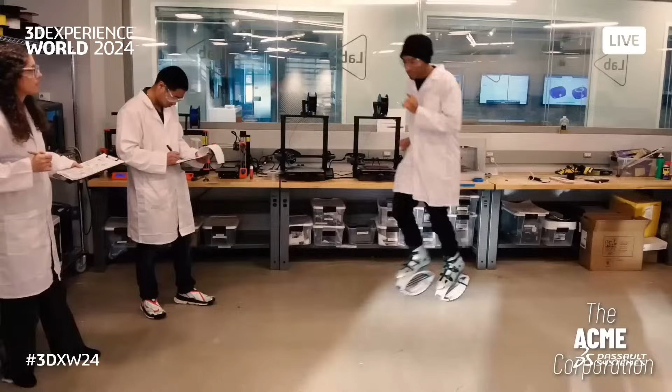My grandfather always used to say, our job is simple, to give the customers what they want, no matter what it is. And that really defines us today. Other companies might produce a product here and there, but at Acme, we make everything, literally. As you can imagine, our product portfolio is extremely robust. And of course, this can present significant engineering challenges. But whether we're looking to fix a minor design flaw or shatter the laws of nature and physics, we will never tell a customer no, even if maybe we should. It doesn't matter if you're a Fortune 500 executive, a startup entrepreneur, or an anthropomorphic wolf-like creature looking to catch and eat a flightless bird. If you can dream it up, we will deliver something.

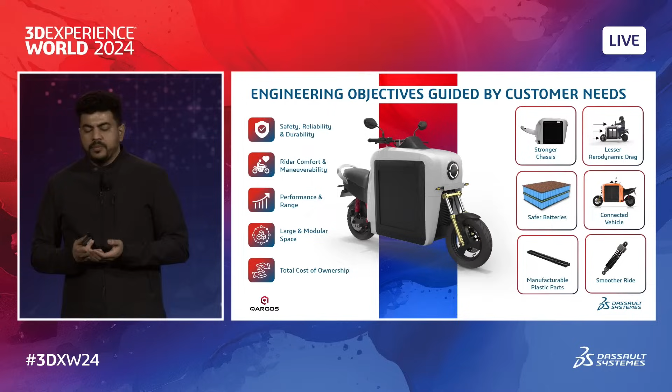And on the right side, you can see the translation of the customer wants and needs into engineering requirements, which talks about the stronger chassis, lesser aerodynamic drag for the fatigue, safer batteries so that they don't catch fire, connected vehicle platform, because we are talking about tech, the traceability, tractability, the design for manufacturing, and at the same time, smoother ride.

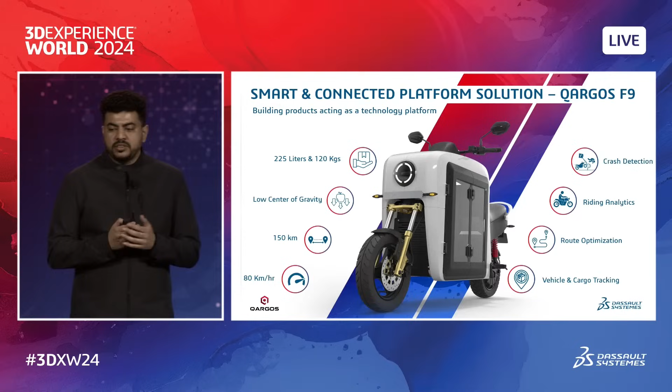So today we are introducing the world's first cargo scooter platform, which has got 225 liters of space, 120 kgs, lower center of gravity, 150 kilometers of range, about 100 miles, 80 kilometers per hour top speed. Now, the architecture is potentially much more potent for higher speeds, and it has been designed like that. At the same time, we have built it as a technology platform, which helps improve efficiency by integrating a lot of new sensors. Maybe you can talk about crash detection, riding analytics, route optimization, vehicle cargo, and tracking. So we have built it as a deep tech platform.

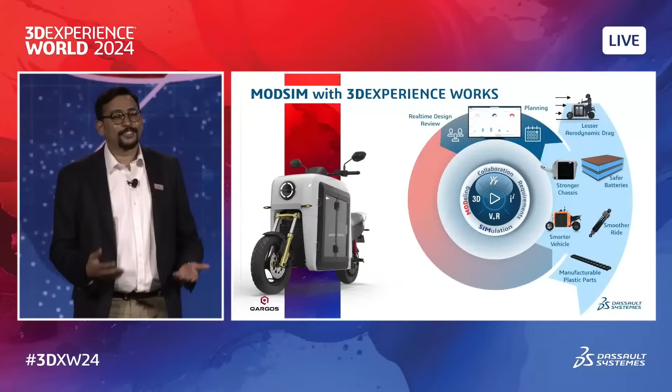Just an idea. Yes, absolutely. We will definitely find a lot of applications for it, and that's a nice idea. We can definitely create some safe space inside it as well.

So during this particular journey of product development, a lot of companies get into the vicious cycle of build, test, break of prototypes, and we didn't want to get into that trap. To avoid that, what we essentially did is leverage the ModSim approach, a unified modeling and simulation approach, which helped us reduce our overall product development cycle time far below what it typically takes to develop a product like this.

And because this does not have benchmarks, when you don't have benchmarks, each iteration that you do becomes a benchmark. So instead of real-world iterations, you are doing digital iterations which help you build, test, break digitally, not in the real world. It saves time, it saves cost, because at the end of the day, it's the computers which can run 24/7 and help you deliver on the results.

So to name a few, we'll be talking about them in detail. So we leveraged the 3DEXPERIENCE platform to its full potential to make the product much more robust, so that when it comes out in the market, it is in the media and in the news for the right reasons and not for the wrong reasons, right? We want everybody to be safe, and that's what we have essentially leveraged.

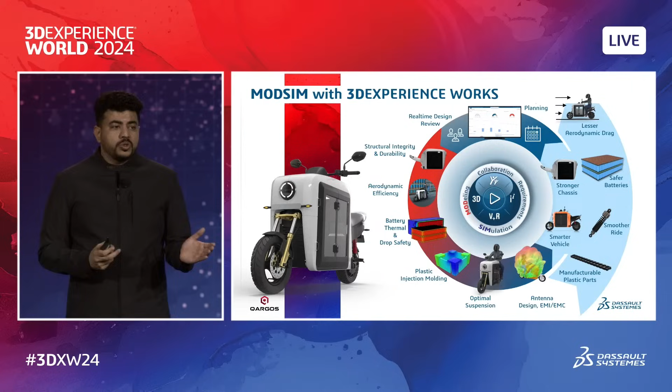I must also say that just like the way we are trying to simplify the lives of people or the logistics, in similar fashion, the ModSim approach has simplified the product development cycle. Can you share a couple of examples?

So let me invite my colleague, Pranav, who is going to talk us through the simulation journey that we have done. Right. Thank you. So we saw how the rocket-powered vehicle crashed. It's mostly because the aerodynamics is not right, I believe. But we did the simulations on our vehicle. The drag simulations gave us a good ride and handling phenomenon on the vehicle.

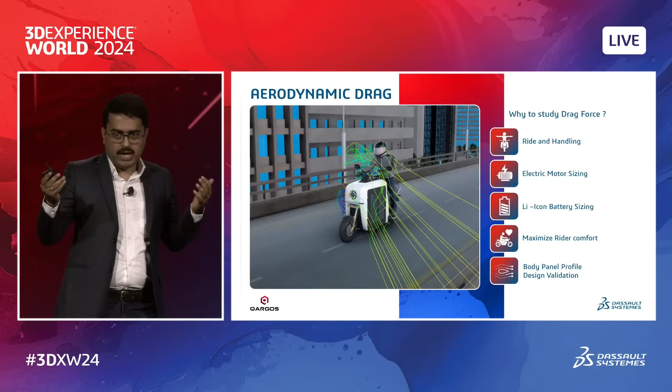We did the simulations and understood the forces acting on the vehicle from the front, the left side, and even the crosswinds. The drag is also important to understand the vehicle motor sizing, right? If there is a higher drag, we need higher power to push the vehicle. It means we need to put a bigger motor and a bigger battery pack, which is going to increase the cost of the vehicle.

Then we also tried to understand the rider comfort. Imagine there is a lot of turbulence coming onto the rider's face; it is going to make him fatigued very early, making the ride not very comfortable. We want him to enjoy the ride as much as possible.

Then the very important reason why we did the simulations is to understand the streamline flow across the vehicle panels. How it helps us is we get the first instinct on how the body panels need to be designed. So what you see here, the body panels have been designed with respect to their aerodynamic drag calculations and the streamline flow. Let's look at how we did it.

So we did the simulations with both the front wind and the crosswinds onto the vehicle, right? Crosswinds can happen for multiple reasons. It could be in windy areas, or maybe a heavy truck passing through, and thus we identified the pressure zones acting on the vehicle.

You can see in the first case, in the front wind, there are a lot of pressure zones created on the vehicle, basically on the console panel and the front side. When it comes to crosswinds, we see a lot of red areas on the side panel of the vehicle. The 15-degree angle crosswind, 30-degree angle crosswind, and so on.

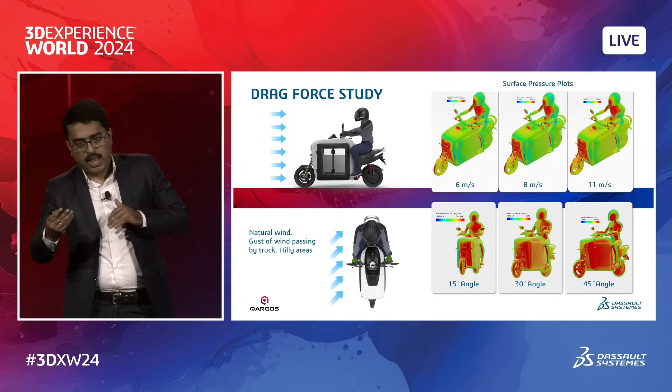So Pranav, you ran these simulations on the 3DEXPERIENCE platform? Sure. With the fluid dynamics engineer role, all on cloud. You got the results and identified some of the hot spots, high stagnation areas on the vehicle. Yes. What kind of design changes did you make going back to SOLIDWORKS? Well, yes, we can show you that.

So this is one particular high pressure area acting on the front side, right? You can see initially the design was kind of a shark fin type. This was modified to a much curvier shape. So you can see the existing vehicle with the modified design. This has helped us reduce the drag to a large extent. And that's what we're seeing right here.

Yes, that's the one here. So maybe for the rocket-powered vehicle we need to do something like this.

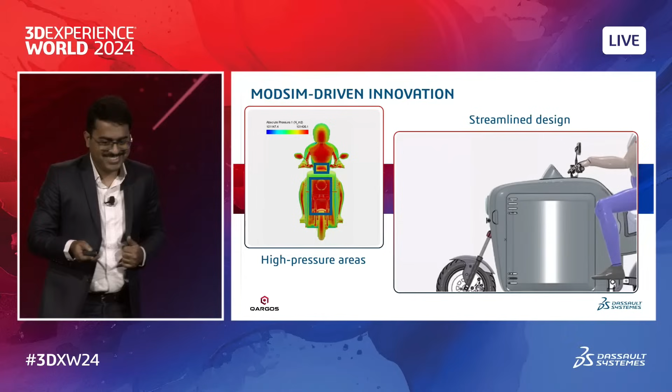All right. Yep. So this is one of the challenges that we faced. Let's talk about the battery also.

So this is one particular challenge we face a lot in electric vehicles nowadays. This is the exploded view of the battery pack, which showcases multiple materials and different components involved. As you see, there are quite a number of materials used, and different types of materials. For example, shock absorbing foam, aluminum material, injection plastic cell holders, and these all contribute differently to the thermals of the battery pack. Let's look how.

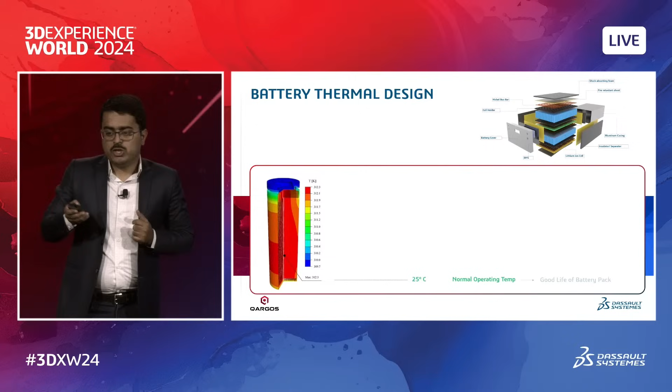So a battery pack consists of a number of cells, right? These are lithium ion cells. Now lithium ion cells are essentially electrochemical in nature, and since they are electrochemical, they are sensitive to temperatures around them. So if you push the battery pack to higher temperatures, there is a chance of it getting damaged. If you push it further, there is a chance of having a thermal runaway.

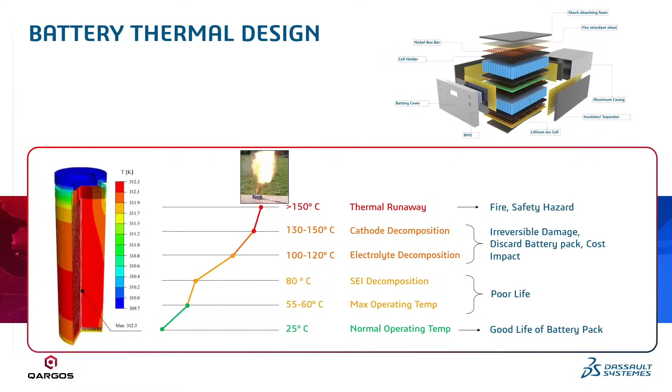What it means is one of the cells will catch fire and it will transfer the heat to its adjacent cells, and so on. A chain reaction starts, leading to the entire battery pack catching fire and exploding. This is a safety hazard, right? So how did we solve this issue?

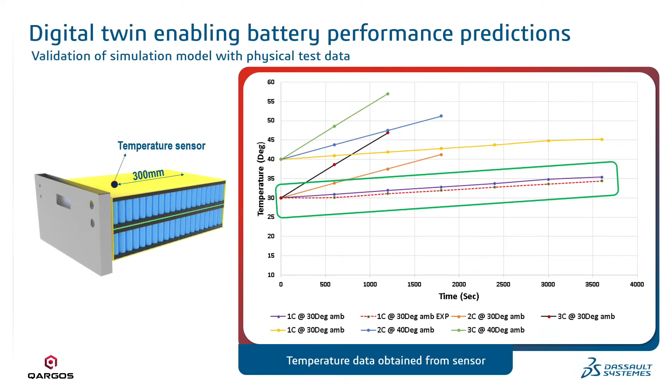Let's understand. We conducted simulations on this, and we understood the temperature rise of the battery pack at various different points, and we also did the physical tests, and then we matched both the curves. So here you see both the simulation and the experimental results match with a strong correlation. This is extremely important. This is for the worst case scenario on a hot sunny day.

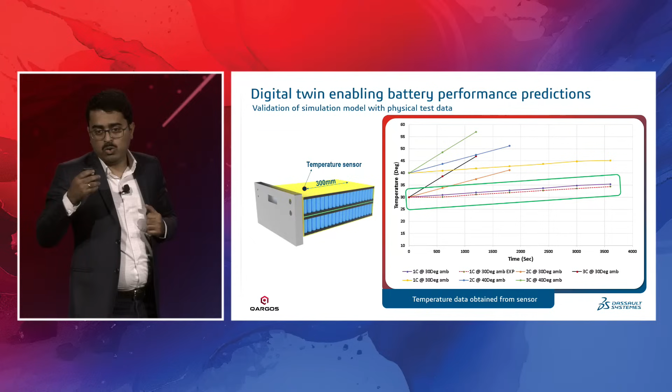So you see 6 cases over here. The bottom case is the worst case scenario, and we did try to achieve a good amount of correlation in this particular phase. Let's look at the graphs. This particular image explains how the thermal runaway happens. If one cell is heating, it passes the heat to its adjacent cells, and so on, a reaction will happen, causing the battery pack to explode and catch fire.

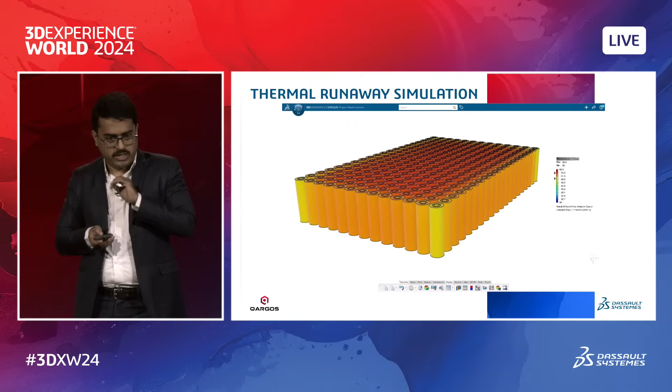Anyways, we are going to see a lot about these two challenges in depth in our user sessions. We have seen today the battery, and tomorrow we are going to talk about the aerodynamics. For now, let me call on Alok to discuss the MODSIM benefits. Thank you, Pranav.

Thank you, Pranav. He reminded me of the whole journey we have gone through with so many simulations that we have carried out in building this vehicle. When we look at the MODSIM benefits, there are plenty of them. We can go on talking about it, but one of the key things which I personally like is the cloud computing. Being a startup, you always have limited resources.

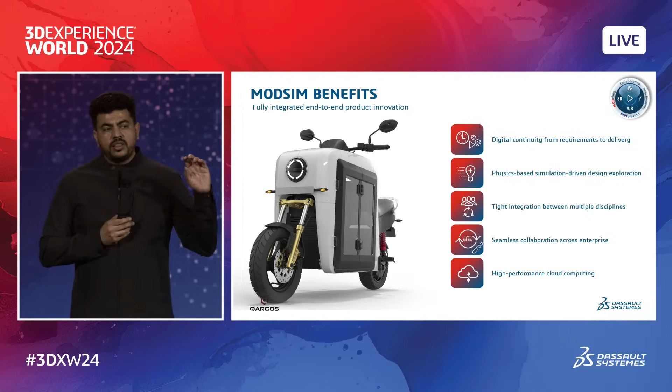So being able to do simulation remotely without having your own infrastructure was one of the most important elements allowing us to do complex simulation much faster. If we had done that on our machines, it would have performed, definitely. But with cloud computing, your resources are basically free to do whatever you want while the simulation is being carried out. At the same time, there's the collaboration, and you can monitor and look at the simulations remotely as well.

So let's talk about the benefits you have realized because of the MODSIM approach on the overall vehicle design. Definitely, Shri Krishna. We cut down the weight by 30%. We made the vehicle far more aerodynamic than it was previously. At the same time, we maximized the cargo compartment. When we started, the cargo compartment was about 175 liters. By virtue of having a compact battery pack that we are currently in the process of getting done, we have maximized the cargo space from 175 all the way to 225. That's a massive increase.

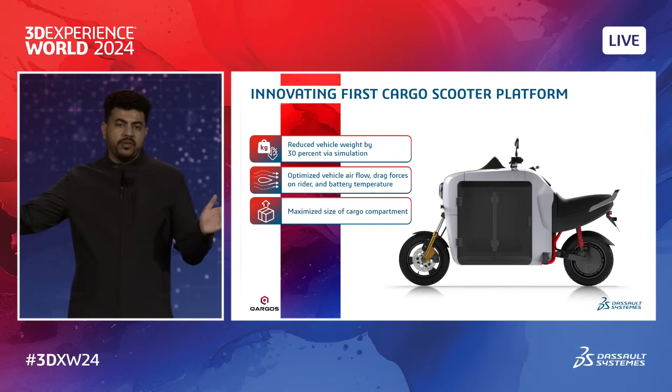That's big. And tell us a little bit about the projects that are lined up this year. There are plenty of them. We are all excited about it. Internal testing, the battery drop test, the new battery that we are designing right now. We are working on this right now. We are very, very excited, and we are happy to share our journey.

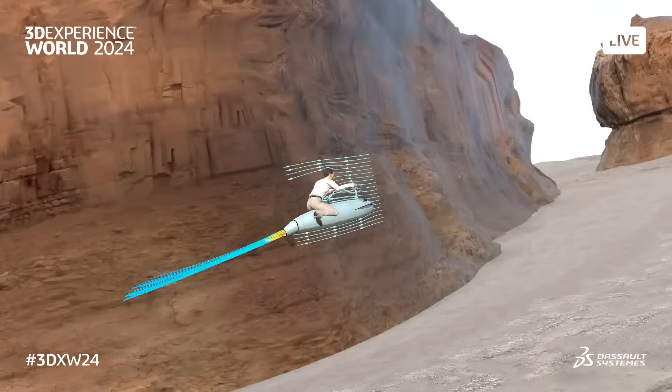And can you guess what was the big design change we made? Well, I noticed that it's more blue than mine. Yeah, that is a color very attractive to kids these days, but it's the wings that were missing in the front. Oh, yep. Fantastic. That's great. You guys are awesome. Oh, trust me, we know.

Now, tell me if you have some other product challenges that you're running into. Okay, gladly. Well, you might not figure this, but our best-selling product that Acme makes is an anvil. We sell tons of anvils, no pun intended. Wow. Sure. But what we find is that our customers really love to just drop them on the heads of their enemies, fair enough. But the problem is anvils are very heavy. Yep. So if you're going to drag it to the top of a mountain cliff or something, by the time you get there, your prey is long gone.

Okay. It's a problem. So we've been trying to experiment with lighter material to make the anvils so that it's light enough to carry, but still heavy enough to create that great big welt that forms on the top of a head, you know what I mean? Oh, I remember that from good old days. Yeah, but there have been some challenges there too. I think I have a drop test here I can show you. All right, let's take a look.

This is a drop test, one of our lighter anvils. And as you see, it was way too light. So that's not going to work at all, obviously. So our next step is we went back to the heavier anvil, and then we bundled it with an old-timey street sweeper, a table fan, and a weather balloon. Obviously, yeah. You can understand the idea that you could just sort of hover it out to the exact spot you want.

But I'm sure you can guess what happened next. We would drop the anvil, and then the whole thing would shoot up into the air. The weather balloon comes untied, then becomes this whole big thing until it smashes into the ground. Wow. It is not great for repeat business. Yeah. So has that damaged your business at all? It's been a real loss leader for the past 200 quarters or so. 200 quarters? Yeah. Wow. Yeah, that's not a long time at all.

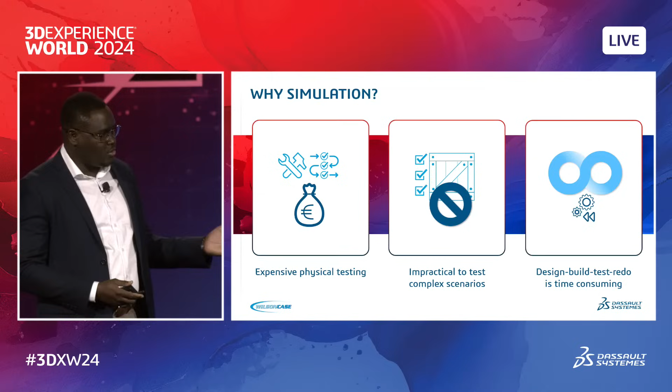So David, what were the primary reasons for really embracing simulation? I mean, you kind of explained that. Yes, absolutely. So we explored various alternatives before settling on simulations. And as you know, you can delve into testing machines to ensure that you can successfully validate your shipping cases. But we decided to opt for a ModSim approach because it is essentially easier to simulate complex scenarios. So after the assessment of our needs and in our quest to address the identified challenges, we explored various alternatives before settling on simulation as the preferred solution. We did some shopping around and finally went with the 3DEXPERIENCE SIMULIA platform.

Now, why simulation? Well, for example, physical testing can be very expensive and can only indicate whether failure occurred, but it cannot determine the degree of failure, nor show you how stresses evolve throughout the body. Whereas with virtual impact simulation, you can simulate and understand how your product would crack under various levels of force, hence making it easy to find failure points early in the product development process. Or sometimes you can be faced with impractical-to-test scenarios. Or let's say you've designed, you've built, and after testing, you realize that there are some weak areas. So you have to go back through the same cycle again, design, build, and test. And this is time consuming. Sounds like that's what you're doing. In a big way, yeah.

Yep. So at this pivotal moment, simulation, with its ability to model complex scenarios, emerged as a proactive response to address the intricacies and limitations we've encountered, since physical lab testing can be significantly costly and limited in certain contexts. Now that we've covered the depth of why simulation, let's move on to our objectives. Our objectives are pretty much straightforward. We want to prevent equipment damage, enhance the structural integrity, and then finally optimize the packaging design for cost effectiveness.

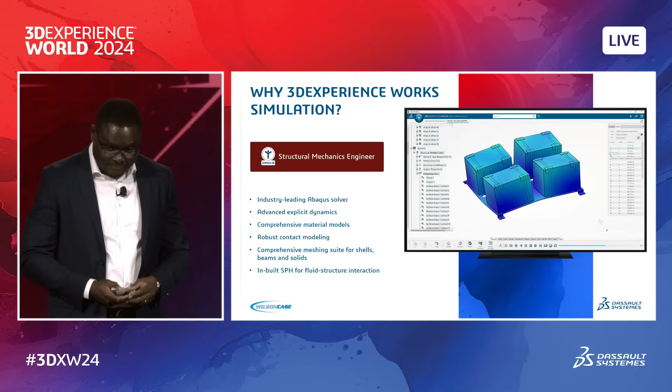Now, why 3DEXPERIENCE Works simulation? I've kind of touched a little bit on this, but again, we explored various alternatives before settling on simulation. One aspect we really love about the Structural Mechanics Engineer role is that it enables you to perform complex structural simulations covering linear and nonlinear statics and dynamics, both implicit and explicit, all taking advantage of the industry-leading Abaqus solver technology. Absolutely. All right.

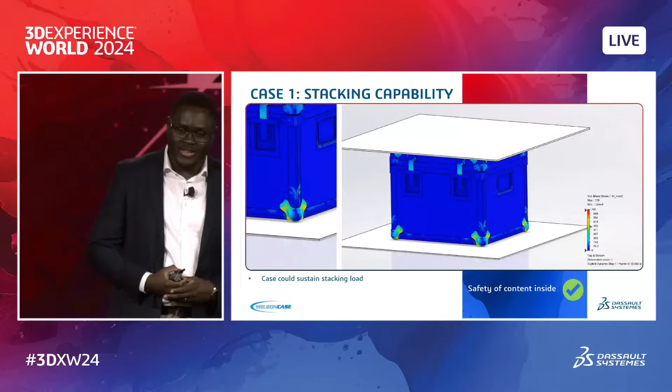Now let's proceed with some case studies. This compression simulation enabled us to ensure that the case can successfully protect the enclosed product from compressive forces that may occur during transportation and handling. This simulation enabled us to ensure the quality and reliability of our shipping case. And as you can see, Mr. Warner, the case is doing a great job in protecting the content. I see that.

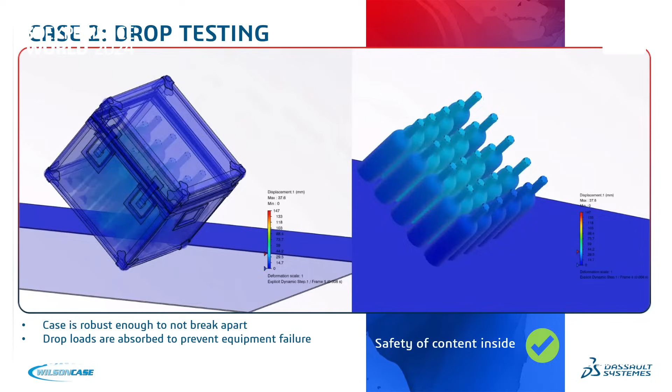This drop test simulation enabled us to ensure that the case is robust enough not to break apart and that the drop loads are absorbed in order to prevent equipment failure. And the case is performing really well in protecting the content. So David, if I may ask, while it's a beautiful looking simulation, it's also a very complex and compute-intensive simulation. Can you elaborate, how have you been dealing with those massive computational requirements? Yes, absolutely. And that's the beauty of simulating these complex structures on the platform. Whenever you invoke design changes, these changes will be automatically reflected on the platform. So at that point, all you have to do is update the model and rerun your simulations. And pretty much all on cloud. Exactly, all on cloud. All right.

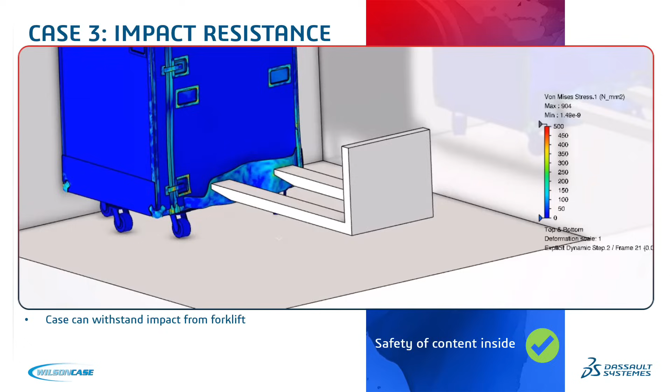This forklift impact simulation enabled us to understand how our case would respond to this kind of impact. It enabled us to assess the structural response of our case. And after running the analysis, we realized that the case is robust enough to protect the content from potential damage.

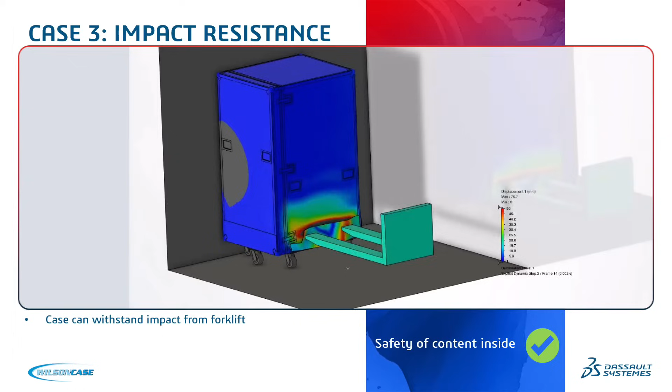These are some really cool structural simulations because as engineers, we like to see things break, poke, and fall. Exactly, Sri Krishna.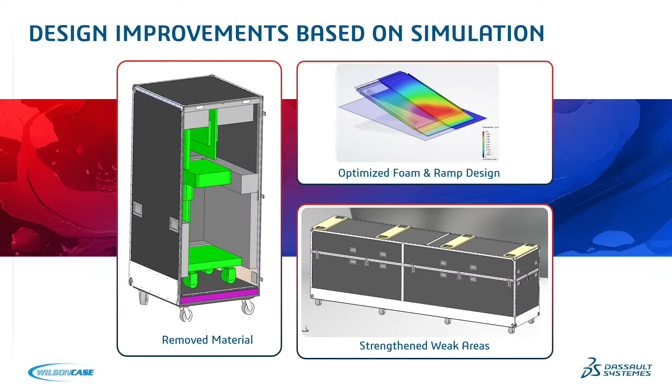In the bottom picture here, after a rigorous examination through simulations, we also noticed that the top panel needed to be strengthened in order to sustain the load-bearing capacity of another case being stacked on top of it. And that's why we've added these rectangular panels in order to give that rigidity to the case. All right, and you're making all these designs in SolidWorks, updating on the platform seamlessly.

Exactly. That's great. Tell us some of the values or the benefits that you've realized because of these design changes, because of these improvements as an overall organization. So with 3DEXPERIENCE Works, we are able to give our customers a value-driven product by reducing prototyping and warranty cost. We can also decrease material cost, enhance quality and customer satisfaction. And finally, the ModSim approach has facilitated entry into new markets, driving business growth for us.

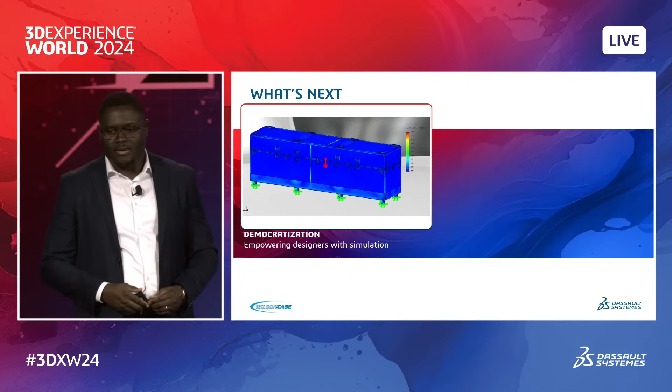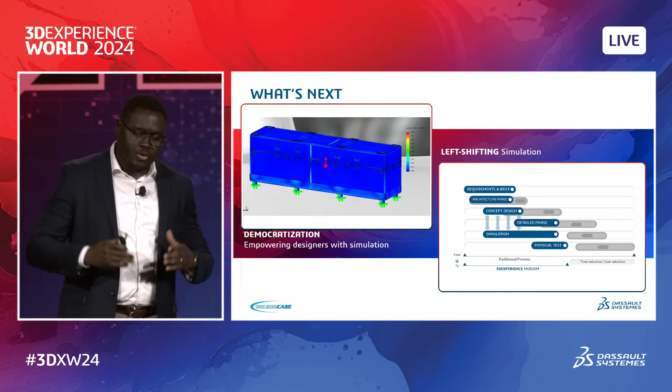Before we conclude, let's set the stage for innovation by exploring our roadmap for future work. We're working on the democratization process by empowering designers with simulation. And also, we want to left shift our innovation processes. As we move forward, let's embrace the power of ModSim to revolutionize the way we approach reusable shipping case designs. Thank you for your attention.

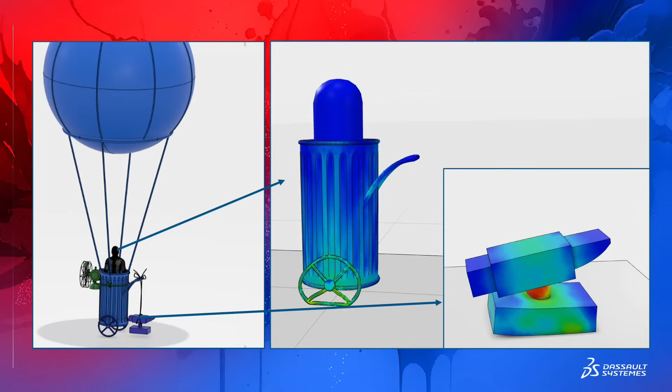You know what? I explained your use case to our product engineers and designers. They didn't really get it, but nonetheless, they created an impact simulation and optimized the design of your very interesting vehicle. Let's see what we got. So on the right hand side are the impact tests, and on the left hand side is your breakthrough revolutionary design. And what we found out from the simulations of the optimized product is that the anvil is now able to go down without breaking, and so is the impressive vehicle that you guys have designed. This is great. If we adopt this, I'm going to be rich. Richer, of course.

Listen, can I ask you about one other problem we're having? Sure. Because I want to talk about modernization. Our company has always been very analog. We make mechanical projects. Of course, sometimes there's radio-controlled things here and there, but those never worked, and no one ever really expected them to. But today, all customers want everything to be smart and connected, and that's causing a real headache for Acme. Here's an example. We tried to make a drone recently, and it did not go well. Do we have a clip of this?

Sure. So whenever we make the drone, at first it works well, but inevitably after a couple seconds, it starts attacking the engineer, see? Yeah, he got banged up a lot with that one. And the problem is we did our market research, and it turns out customers almost never want a drone that tries to kill them. Well, it looks like you need help with improving the communication between the controllers and their devices like the drone, probably some improvement in the antenna design. So we have somebody here who has a ton of experience dealing with a somewhat similar issue, not killer drones, but antennas. Let's meet him.

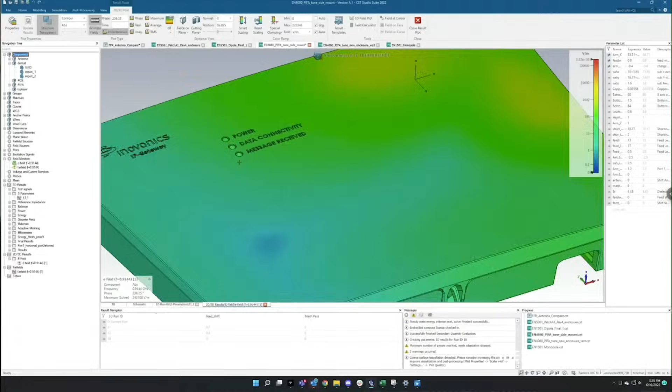Inovonics is an industry lead in wireless technologies. I think it's a very creative process when it comes to designing antenna. Anything can be an antenna. Sometimes some things are antennas when you don't want it to be. I've built some pretty unconventional antennas in the past year and a half that I don't think would have been possible to make without 3D simulation. You can really break the boundaries of creativity with how you can fit something in a place maybe it shouldn't have fit in before.

Ladies and gentlemen, please welcome Mark Zackham from Inovonics. Welcome, Mark. Good to see you. Thank you, thank you. Nice to meet you.

Nice to meet you. So, Mark, my friend Corey here is dealing with some killer drones which are having wireless communication issues. Tell us how you develop antennas and make them safe and efficient without chasing people around. Yeah, hopefully I can help you with that, Mr. Warner. I'm Mark Zackham. I'm a hardware design engineer at Inovonics. And today I'm going to go through a bit of our design process and what it takes to make an antenna for modern devices. Go for it.

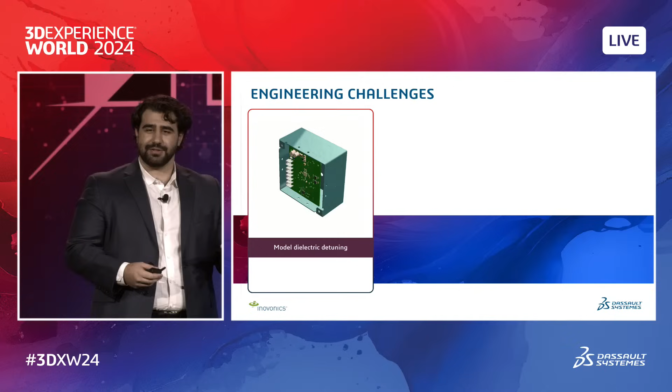All right, Inovonics. Inovonics is a leader in wireless technology. We make custom hardware and software solutions for various markets. Some of these markets are senior living and commercial security. When it comes to designing an antenna, we're going to have a plethora of engineering challenges to overcome. I've kind of summarized these into 3 different challenges to go through the whole process. This way we can understand what it takes to make something as complex as an antenna.

The first one is modeling dielectric detuning. Now, what do I mean when I say dielectric? In simple terms, dielectric is just a way of describing a material in the way it interacts with an electrostatic field. The more different the dielectric constant is, which is just a number we put to that value, the more it will affect the antenna.

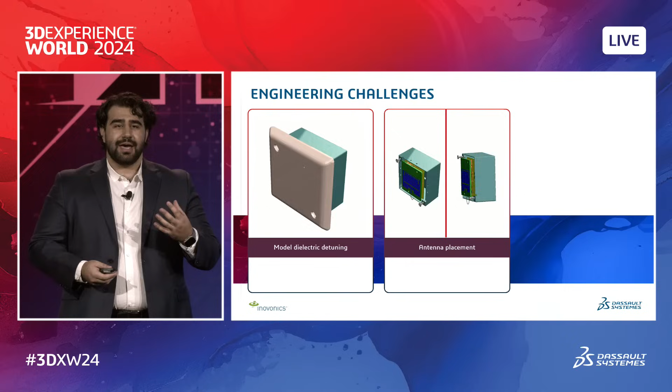Our next challenge is antenna placement. This is for inside an enclosure and also within the environment that it needs to be placed in. When it's inside the enclosure, where the antenna is placed is extremely important. We want to make sure that it can radiate the way we want it to and that nothing is interfering with it, when it comes to if someone is holding the device, if something gets in front of it. We would need to account for all those situations when it comes to designing an antenna.

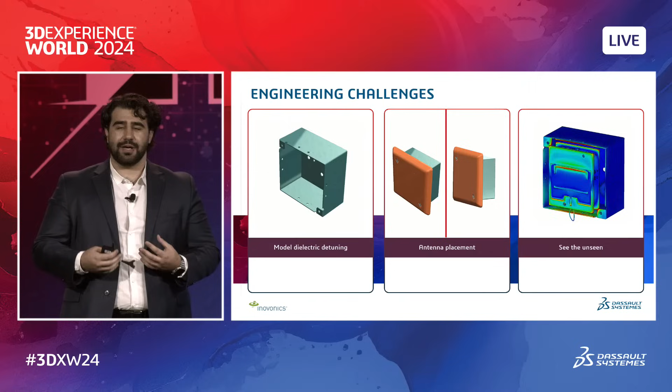And last but not least, see the unseen. Now, before simulation softwares, we really couldn't see how antennas radiate. It's just not something that we can do. But with simulation softwares, we are able to understand the way our antenna is performing and the way our antenna is interacting with the environment around it. And it's also really nice eye candy to look at when you're watching these simulations.

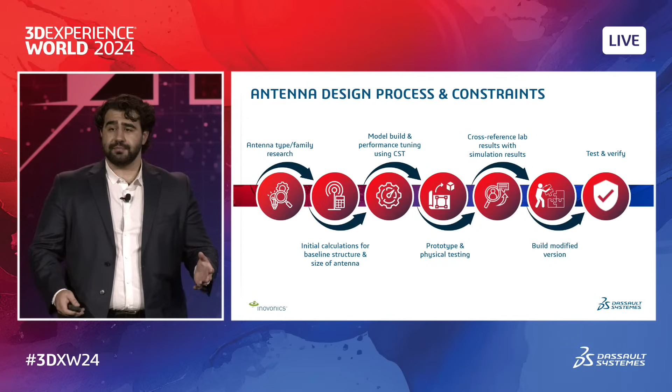So, Mark, some of us don't come from the electromagnetic background. So tell us, what is the typical process of an antenna design in very simple terms? Yes, of course. So, as most design processes go, it all starts on a tissue paper. What do you want to make this for? Where is this antenna going to be placed, and what does it need to do? From there, you'll get a rough idea of the type of antenna you want, and you'll do basic initial calculations.

Those calculations can build you a rough model in simulation, and then from there, you can go and make a prototype. These prototypes are tested in labs, and we try to get the same results we've been seeing on the simulation platform. We overlay the lab results and our simulation results together to try to build a more accurate simulated model, so in the next revisions, we know that it will show what we're seeing in real life. And then we keep this process going until we have a design that we like for production.

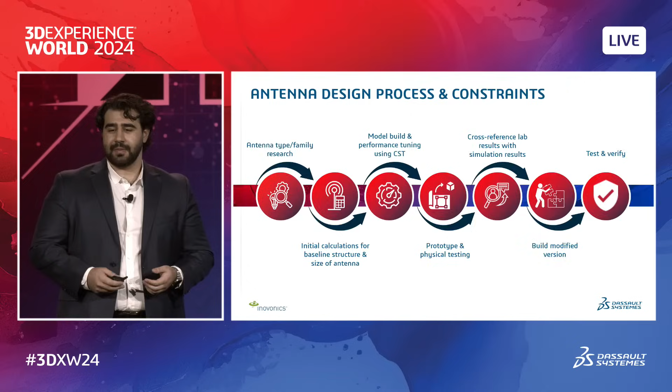So why 3DEXPERIENCE works. One, this platform is extremely powerful. The ease of use of building a model and getting it to prototype is quicker than other solutions that I've seen, specifically within CST Studio, which is the electromagnetic solver that we use to perform all our work. With this, we can simulate rooms, model scattering, see placement of our antennas, understand different environments and different scenarios to do my job right and make sure that the customer gets something that works every time.

So Mark, you perform electromagnetic simulations in the electromagnetics engineer role on the platform, and then your designers make the design changes recommended by you in SOLIDWORKS, and you're able to collaborate back and forth seamlessly.

Yes, it's pretty incredible. Working with our mechanical engineers, we usually need custom enclosures for every design that we make. All our hardware is custom, so we need to make sure that everything interacts appropriately. Doing the collaboration with our SolidWorks team means that not only do I know that the antenna is in its optimal location, the mechanical engineers understand everything that the hardware engineers need to do to get the product right every time. That's great, thank you.

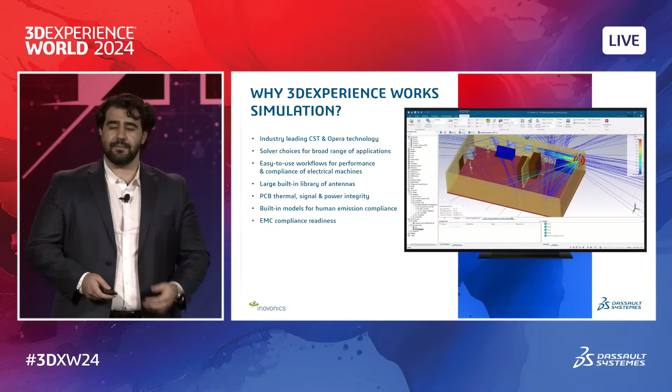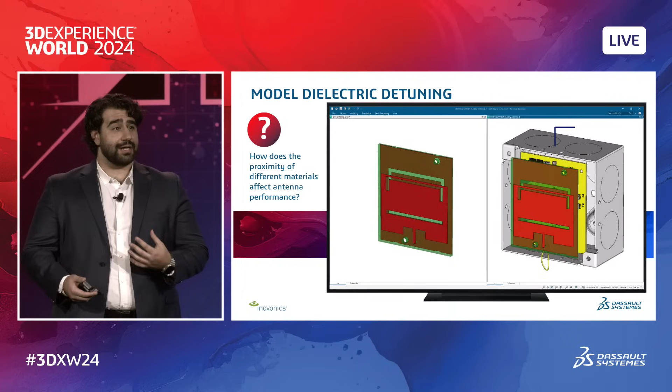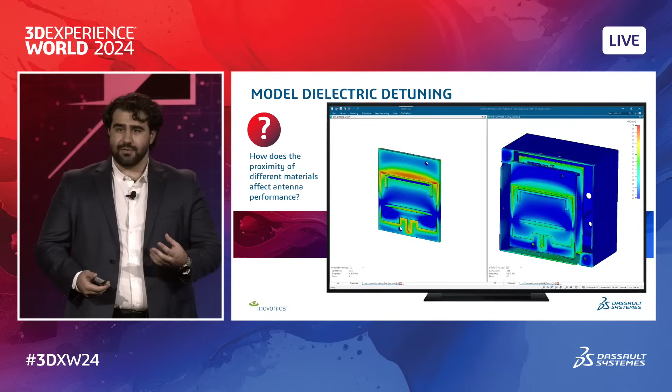So we're going to dive a little deeper into dielectric detuning. When I say detuning, I mean any material that gets within the range of the antenna is going to shift the frequency that the antenna is going to be performing at. And sometimes these shifts can be so great that your antenna becomes out of the bandwidth that it needs to perform in. In CST, we're able to take these materials and the entire enclosure, thankfully from our mechanical engineers, bring it in and understand the effect of these dielectrics on our model.

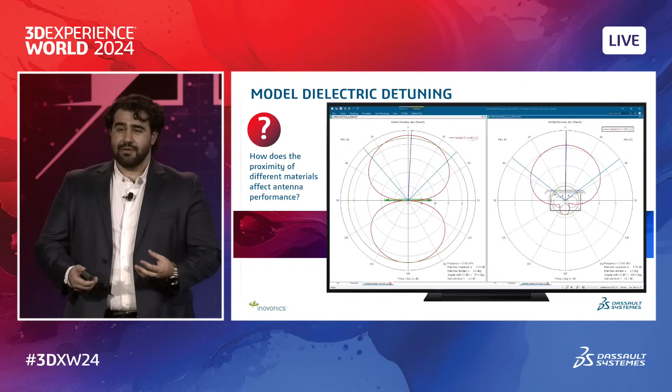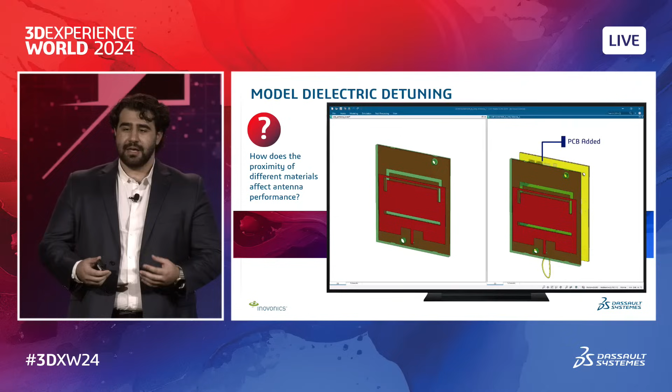From there, we can design the antenna around the detuning to make sure that when the antenna is in its final enclosure, it's actually tuned to the correct frequency. We build it for its design. The design doesn't change it.

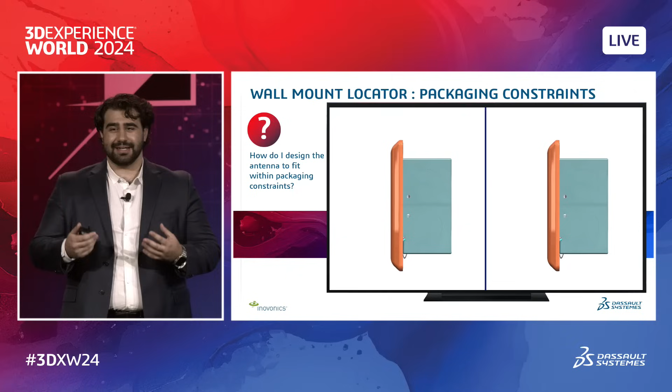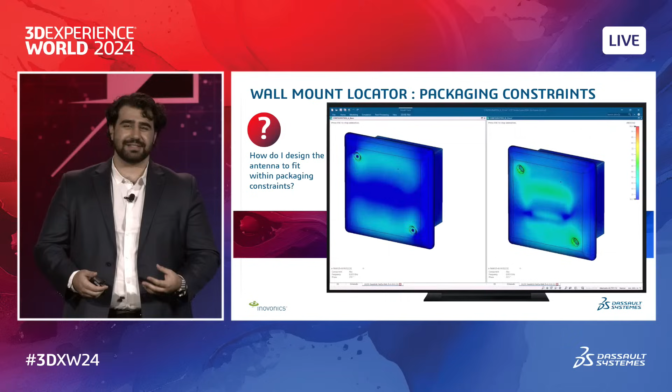And then this leads us into packaging constraints. When it comes to making an antenna, an important thing is understanding where it needs to be and the frequencies it needs to run at. Specifically, our product, the wall mount locator, needs to run at two different frequencies: a lower frequency in the band, sub-gigahertz, and 2.4, which is Bluetooth. To make a dual band patch antenna to work at both those frequencies in a metal box is pretty hard. If anyone knows, metal and antennas aren't great friends, and they tend not to make each other work out.

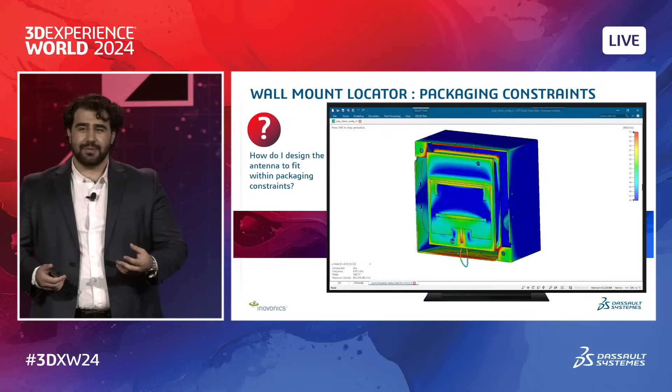So we designed around this. First, we kind of bent the physics of what it means to make a patch antenna fit within a standard 4x4 metal box. At the frequencies we wanted, a normal patch antenna would simply not fit. Through CST Studio, we're able to change things around, do some very clever physics and math to make sure that we design something that not only fit within our constraints, but actually performs phenomenally at both frequencies.

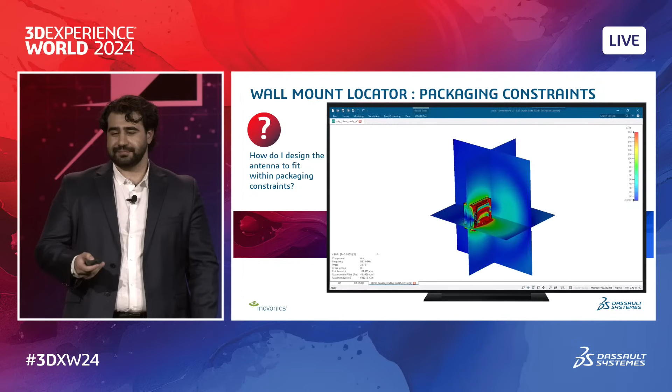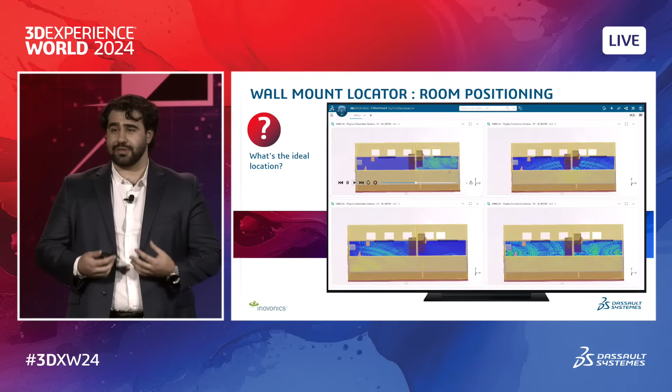And then now we talk about room positioning. Positioning is extremely important. This is a locator. It needs to communicate with our devices to make sure that everything performs optimally. And now we can account for that within software. We don't need to guess when we're on site where to put our locators and see if it works and do multiple runs and testing. We can account for most of what we're going to expect by taking floor plans, making a room model, and seeing how it's going to perform.

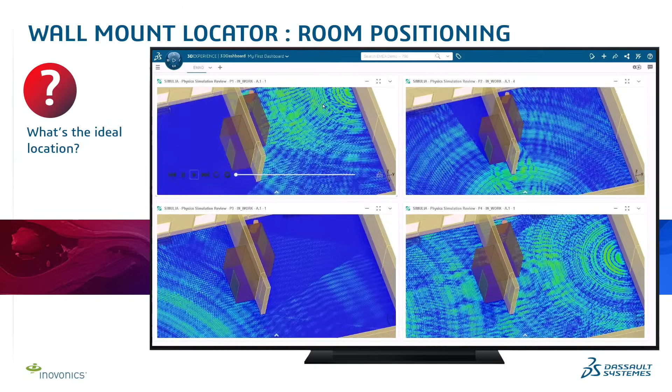We can throw it on the ceiling. We can do different heights on the wall. We can do corners. And we can understand where this needs to be for the best solution. This saves time for our technicians, for the people on site, and for us at Inovonics. So what are the key benefits you have realized because of this amazing work you've done?

There are many benefits that came out of this. One is the ability to work anywhere on any device. Having the online platform allows me to do my job on any device. I just need a browser and internet connection. I can run my simulations on online cores. I don't need powerful computers at all times. Therefore, I could be at a coffee shop with a tablet getting a simulation done, or I could be on site on a powerful computer getting it done.

The possibilities are endless. And collaboration with our mechanical team is also vastly improved, cutting down the work time, what it takes to send files, make sure that we have the newest ones, make sure we're all aligned. The online platform gets that covered for us.

What do you think? Well, I mean, that's all well and good, but you're really telling me that if I just place the antenna in a different spot, that will stop my drones from wanting to attack humanity? Let's find out. So, we took your drone, came up with a nicer antenna design, found the right location, did the dielectric detuning, and we were able to simulate in the electromagnetics engineer role that showed this red apple looking plot, which means that the communication is quite efficient in most of the directions. So this means you can now save a lot of human lives, Mr. Corey. You know what? I'm sold.

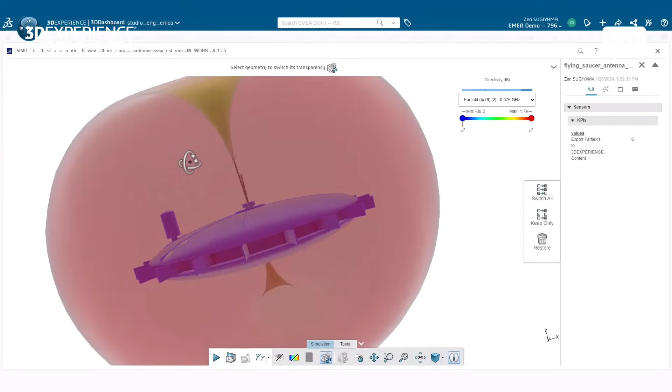This is fabulous. Tell you what, I'm just going to call up a live feed of my office right now. Oh, good. The meeting hasn't started yet. Listen, I have got a face-to-face in my office back in Arizona in about 10 minutes, and I'm going to tell them all about this. Thank you so much. Wait. Did you say Arizona and you're going to be there in 10 minutes? Yes, of course. How's that possible? I'm going to teleport. You're kidding me. Hey, not all of my products are defective, okay? See ya. What? I can't believe this guy. He said he's going to teleport? That's his office. How's he going to be there? Oh, he really made it. Ladies and gentlemen, give a big round of applause to Mr. Corey Warner.

Now that we all learned the values and benefits of unified modeling and simulation, it's time to learn about what more our customers can do with the new updates on the 3DEXPERIENCE Works simulation portfolio. I'm going to invite on stage Delphine and Steve, who lead the product management organizations from the Simulia and Solidworks brands of Dassault Systèmes. Please welcome them with a huge round of applause.

Hey, thank you, hi Steve. Good to see you. Thank you. All right. Thank you, Sri Krishna. What a show. Hey, Stephen, how are you doing? Great to see you on stage. Great to be here. It's good to be back. Yeah, indeed. What do you think of these amazing customer stories?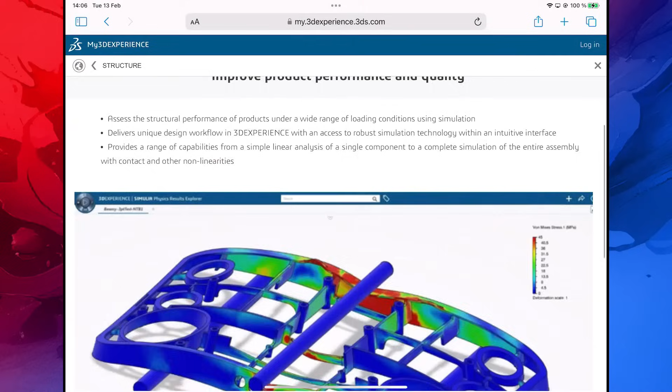And once you go to the simulation portfolio, you can do a deep dive into structural analysis, flow analysis, motion, electromagnetics, plastics, all you'll need to know to develop your products. Definitely, Stephen. So if you do not know yet the 3DEXPERIENCE Works portfolio, I invite you to visit our 3ds.com website and use the compass for your navigation. So let's go on to simulation and talk about structural simulation, which many of you are doing already. We saw some great stories from Cargus and Wilson Case. What have we delivered new for them for 2024?

As I mentioned, we've been busy in 2023 delivering projects around productivity, enhancement of performance, and functionality. Our objective is to deliver a very robust ModSim solution so you can perform your structural simulation faster than ever. With the new release of the structural role and application, users can now simulate large assemblies with symmetric components way faster. If you have a symmetry in your assembly, simply select the plane of symmetry, the mirror meshing capability, define the meshing on one of the parts, and in just one click, the meshing on the entire assembly will be done for you. A great time saver for large assembly simulation. Indeed. The 3DEXPERIENCE simulation portfolio is a cloud portfolio, offering you all the flexibility of the cloud and the power of cloud compute.

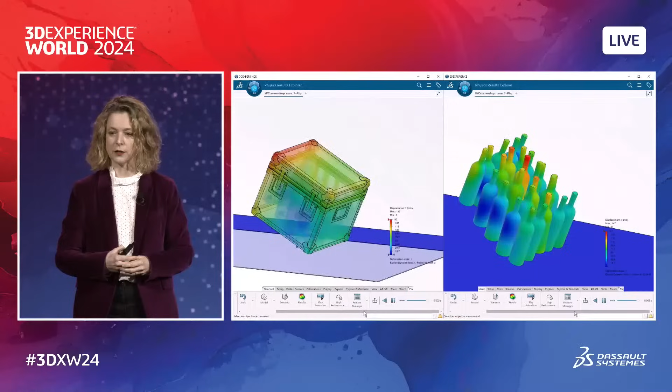In the area of result visualization, you're going to experience a game-changing performance improvement with a new technology to do post-processing way faster on large assemblies again. And you have asked us for more capability to predict product durability more accurately and on any type of geometry.

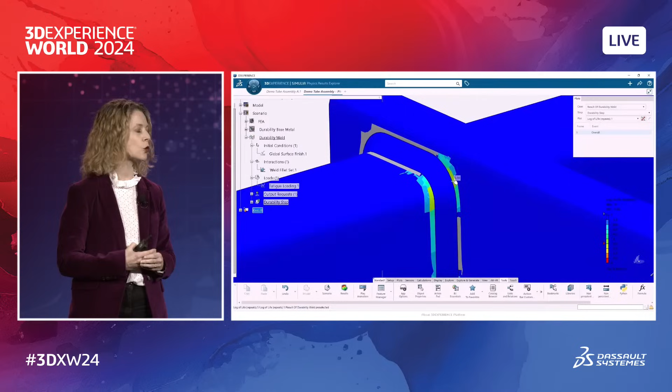We are now delivering the capability to assess the durability of thin structures made of welds. Simply select the weld, and as you can see here, in a few clicks, you will be able to understand and assess the durability of your welds, which are critical in such environments. But we are going further in the durability world. You will be able to assess durability based on new material algorithms.

For example, we have added thermomechanical creep fatigue simulation in the material setup, so you will be able to perform fatigue failure analysis at very high temperature. And we have developed this algorithm with the world-recognized Fraunhofer Institute, the best of the best for the SOLIDWORKS community. Always the best of the best.

And I think you'll find with these advanced capabilities and power that begin with cloud compute, our customers can really flex their innovation power on their product developments. Yeah, definitely, and that's really our objective. That's what drives us. Cargos showed us their great CFD simulation to enhance the aerodynamic performance of their e-scooter. Stephen, I know CFD is close to your heart. What have we done on fluid dynamic engineering in 2023?

Well, we've done a lot, and I think really what you saw from what Cargos were doing, they use streamlines a lot to understand how the flow goes around their product. It's a very large problem, and when you deal with large problems, you end up with a large data set. And handling that data set and investigating that data set can be troublesome.

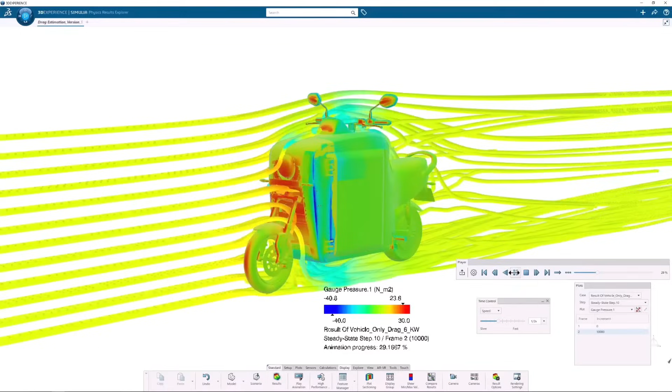We can solve the problems on the cloud, and with the release of 2024, we can now do cloud results visualization, which is a really handy thing for people like Cargos, so they can just send their product to the cloud, solve it, investigate it, and make engineering changes really, really fast.

But flow analysis isn't just about flow around a product. It's about the effect of the flow on the product. This is what we call fluid structural interaction. We want to see how the flow changes the shape of the product. And we can do that really simply now with fluid structural interaction with sequential coupling. And I think our customers will now take the next step in the evolution of their analysis in this domain.

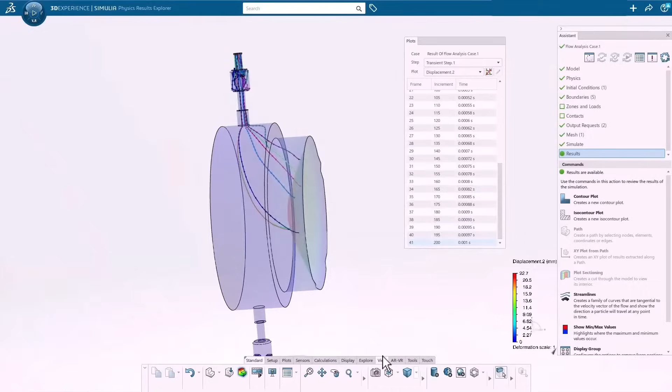Wait, Stephen. Let me ask you, did you just say that SOLIDWORKS customers will now be able to do multi-physics in 3DEXPERIENCE simulation? Indeed, we will do multi-physics simulation, something a lot of you have asked for a long time, and we're delivering it now. Wow. This announcement for intuitive and robust result exploration, as well as multi-physics during the design process, is really coming from you, for your needs, listening to how you can improve your product quality.

I think Environics is a great example of how the needs of our customers have changed over time. Yep. With digitalization, adding PCBs, communication, the need for people to understand the physics of their products, the electromagnetic waves, is really, really important. What have we done for those people now? We've done a lot again.

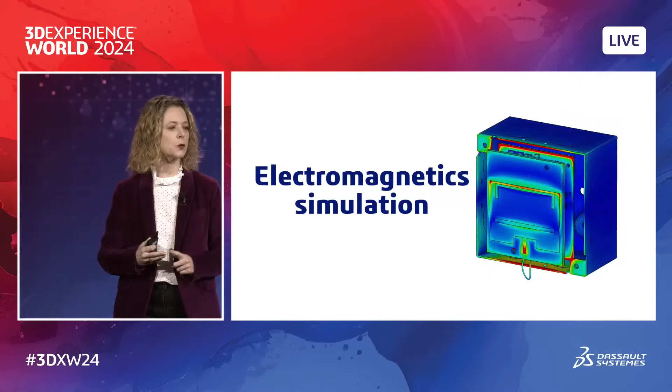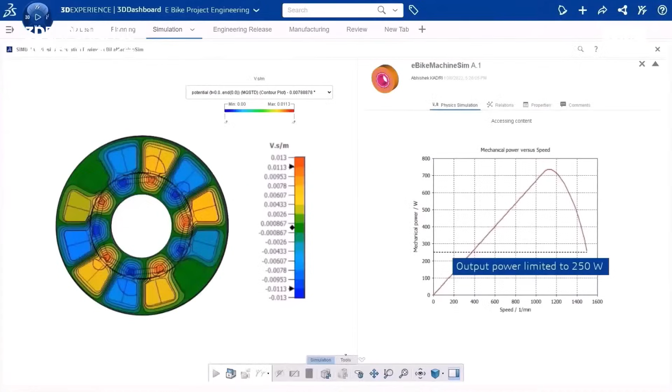Many electromagnetic devices, such as insulators, circuit breakers, or permanent magnet motors, are working in what we call the low-frequency simulation domain. We have then integrated into Electromagnetic Engineer the specialized Opera technology, so you can accurately assess the performance of these devices early in the design process, in the same Electromagnetic Engineer interface, everything in one.

In order for you to take full advantage of the cloud compute for your electromagnetic compliance and antenna placement simulation that Mac showed us previously, we have enhanced our solver for high-performance cloud computing support, faster and better for your design process. We are then ready to answer your high-frequency simulation needs with the Electromagnetic Engineer role.

In the industrial equipment industry, life science industry, and high-tech industry, you are designing moving parts. You are designing mechanisms from simple to very complex. How to make sure that these mechanisms will work as planned, how to make sure they will sustain their requirements? We have developed SIMULIA 3D Motion Creator as a web-based simulation role tailored to your needs in motion simulation to answer this question. Stephen, what's up in the domain of motion?

Well, I think I agree with you, Delphine. When you're dealing with mechanisms that move with accuracy and precision, you need to do a motion simulation. Yep. And 3D Motion Creator helps us get to the core of the setup and understanding of these types of problems. The challenge we have when we're dealing with large assemblies with lots of joints and sub-assemblies is it's hard to visualize the impact of change.

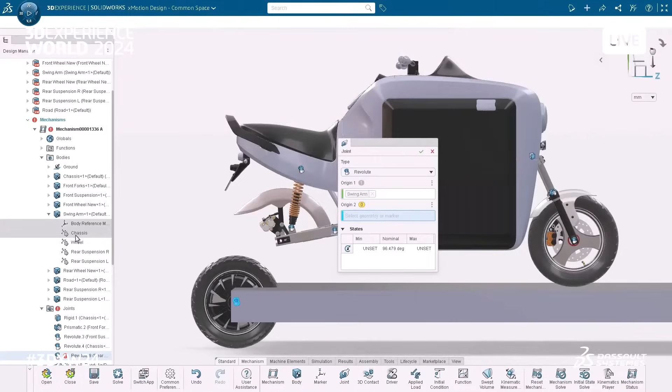What will happen? And we've delivered with the new results joints visualization that you can actually see the impact of change, that if you change a joint, what will the effect have on the way the parts come together. And we'll see here, I activate a joint, I can now visually see, okay, that's now in the right place, and I can move on with my analysis.

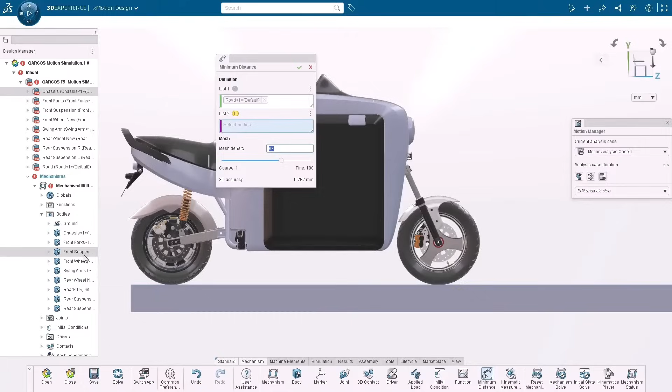And once you've set it up, you need now to think about, well, what do I want to know? And one of the common things we find when we want to find out about motion analysis is I want to see how the parts work in relation to each other. You know, do I bind up? Do I clash? And we can do this very simply with kinematic joint probes. So you can pick two parts in the assembly, a part on the assembly, or even the ground, and understand how close they come to each other in the range of motion.

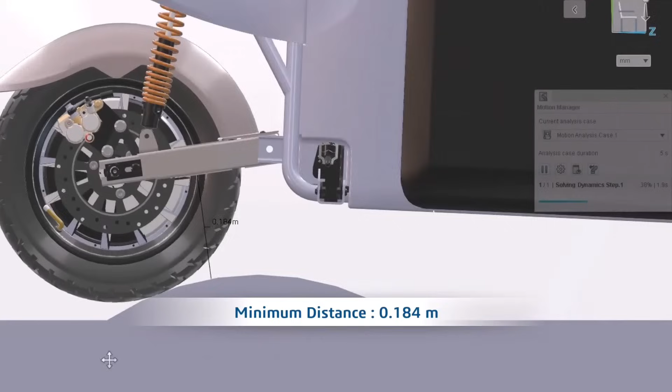And here we're looking at the suspension. We built a simple bump in the road. We're just seeing how the suspension will compress and move as we go over this bump. A very simple setup, but you can see how intuitive it is to set these types of problems and understand what's going on. That's a very simple bump. But what if we wanted to have a more complex bumpy road? Do I then have to model it up in SOLIDWORKS?

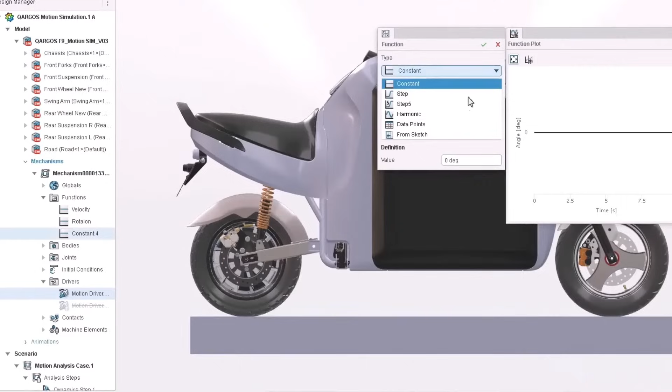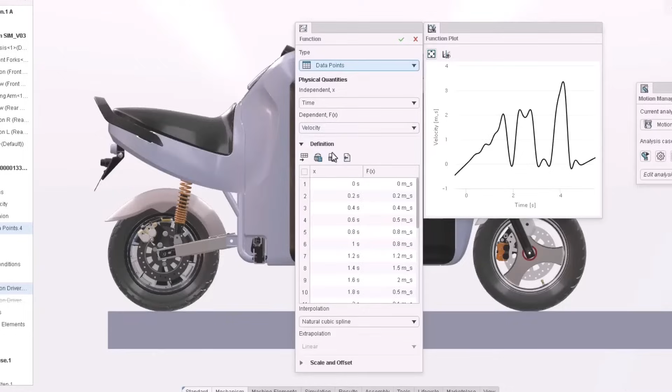No, we don't. What we're going to allow people to use is sketch-based tools to actually then build a very complex driving motion, so you can actually build intelligence and complexity in your analysis very, very simply and very easily. And you can see here, that's a very bumpy road that I'm about to drive my scooter over. Again, set it up once, make it more complex, make it more understandable, but you still get very quick answers and you get to the root of what you're trying to understand. So again, intuitively and informatively. Awesome, awesome. So QARGOS will be ready to assess the e-scooter on any bumpy road in India.

So these announcements are, of course, as Stephen mentioned, just a few highlights of what we have delivered to you in the 3DEXPERIENCE simulation portfolio. If you want to know more and discover everything that we have delivered in the 3DEXPERIENCE simulation role, you have the user community. So don't hesitate to go to your user community. There is a dedicated What's New section where you will be able to learn everything available for you in design, simulation, manufacturing, governance, marketing, and sales. Because that's important to remember again. We are not delivering you a simulation solution in a silo. We are delivering to you a global engineering and manufacturing solution for your needs.

And as you discovered with our customers today, this portfolio is an enabler for innovation. You know, simulation is all about asking the question, what if I change things? What if I do things differently? And we want to remove the barriers between traditional design and simulation and bring them together in this MODSIM environment. Yeah, definitely. So you really have at your fingertips a unique engineering platform to predict and improve the behavior of your design earlier. We speak about left shifting. It's ready and available to you now, so do not miss it. And that concludes our session.